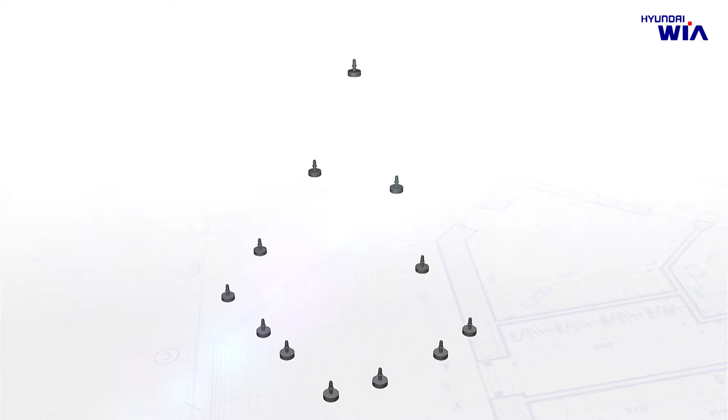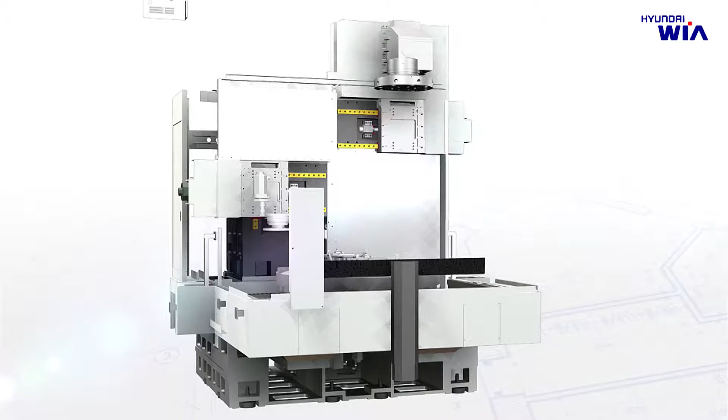Introducing Hyundai-Wia Machine Tools' newly developed alloy wheel lathe LV800 AWTT. Hyundai-Wia's next generation alloy wheel lathe LV800 AWTT, following the horizontal style L500, 600 AW, and vertical style LV800 RAW, uses two turrets and the automatic chuck changer to achieve maximum productivity.

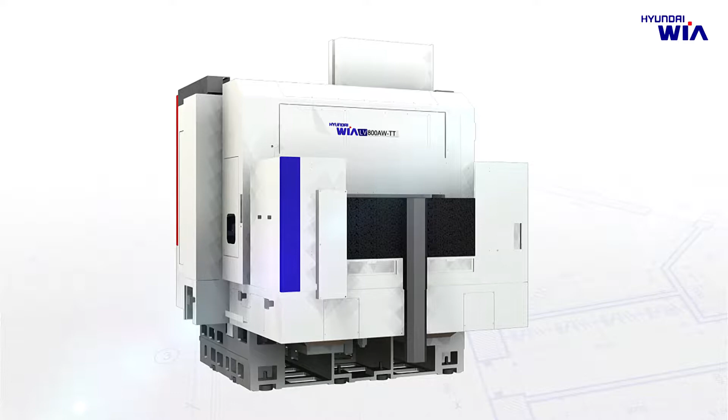Specially designed for 13-inch to 22.5-inch automobile wheels, LV800 AWTT is the vertical lathe designed with a highly rigid structure that can absorb vibration during heavy-duty cutting and wheel machining.

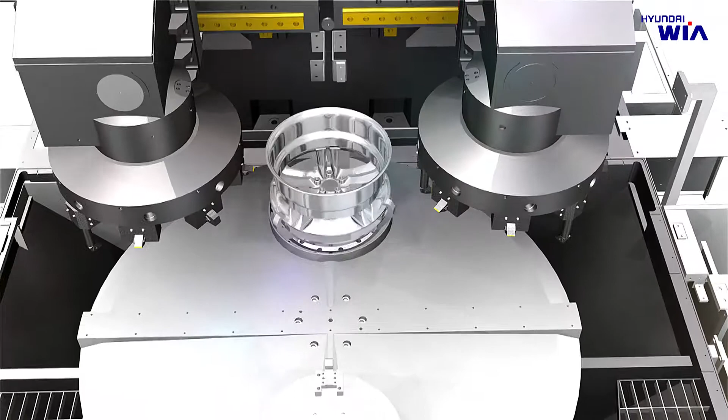For smooth chip disposal, the size of the chip outlet on the bed is enlarged to be 350 millimeters in length and 856 millimeters in width. It is installed with a steep angle of 45 degrees so that it can easily handle a large amount of chips.

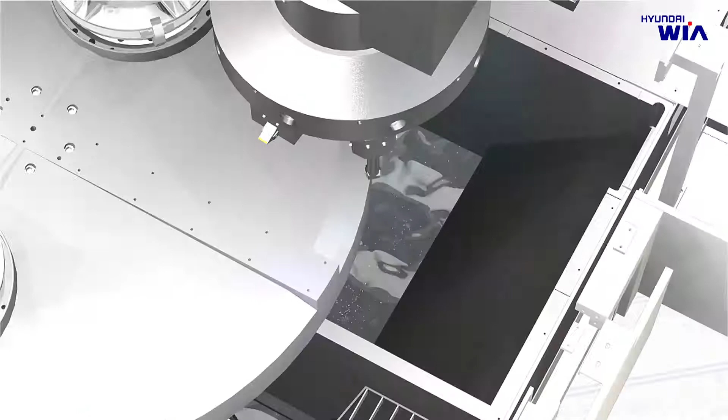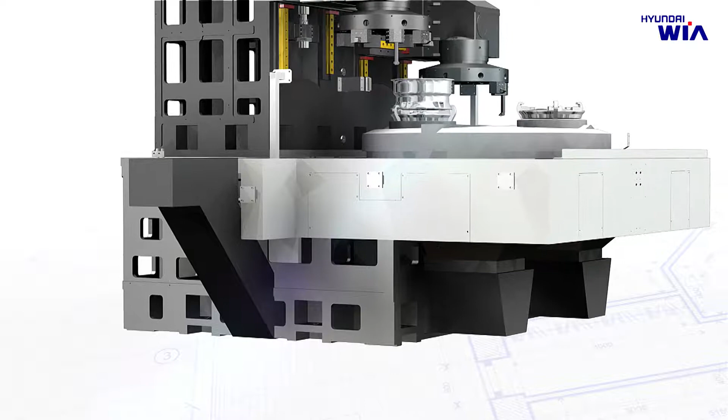Chips can be disposed of by the independent coolant method using the chip conveyor. A mesh drum chip conveyor is provided as an option, which prevents fine chips from falling into the coolant tank. This improves machining quality and durability of the machine.

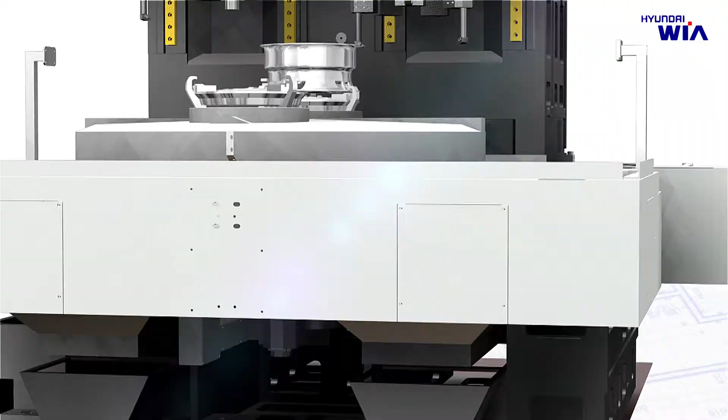When operating with multiple machine tools, the central coolant method can be applied, where chip outlets are made on the factory floor to handle a large amount of chips at once. Two high-pressure coolant devices on the machine can help chips to be smoothly discharged to chip outlets.

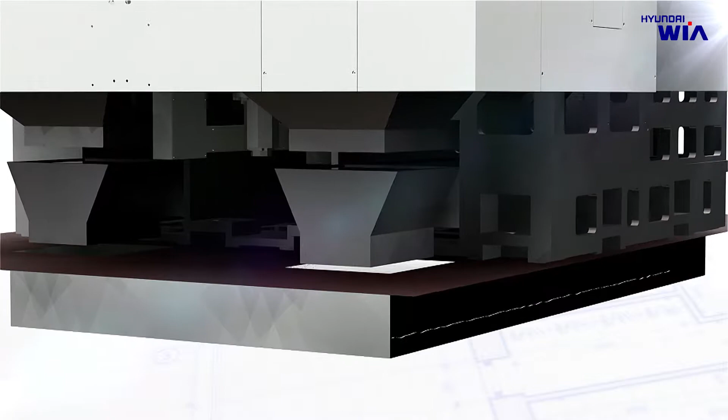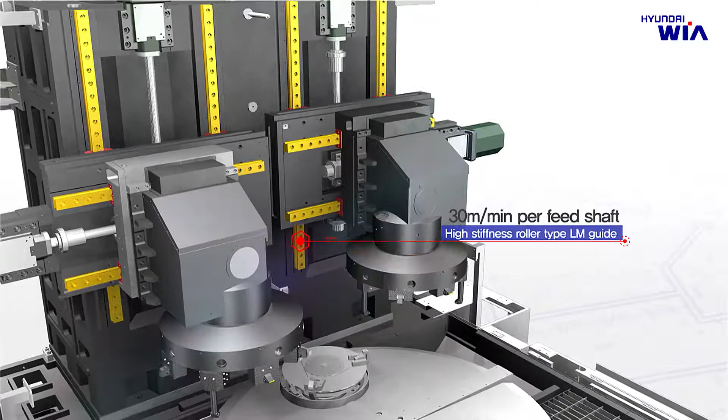Each travel axis is designed with a highly rigid roller-type LM guideway, which enables a rapid traverse rate of 30 meters per minute. The ball screw has a diameter of 40 millimeters and produces powerful thrust for heavy-duty cutting.

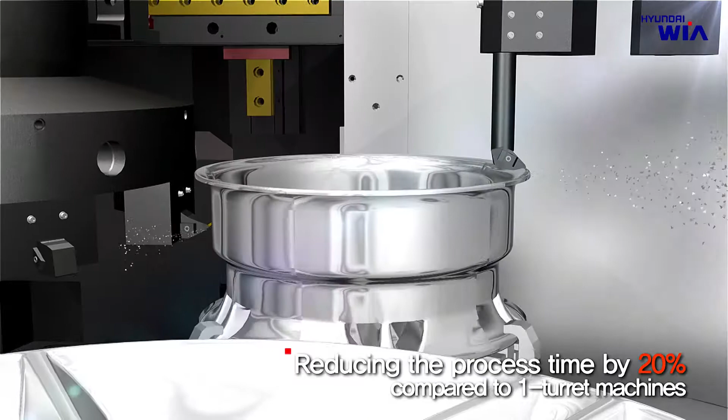LV800 AWTT is designed with two turrets. Machining inner and outer surfaces of the wheel can be done simultaneously, reducing the machining time by 20% compared to that of a one turret machine.

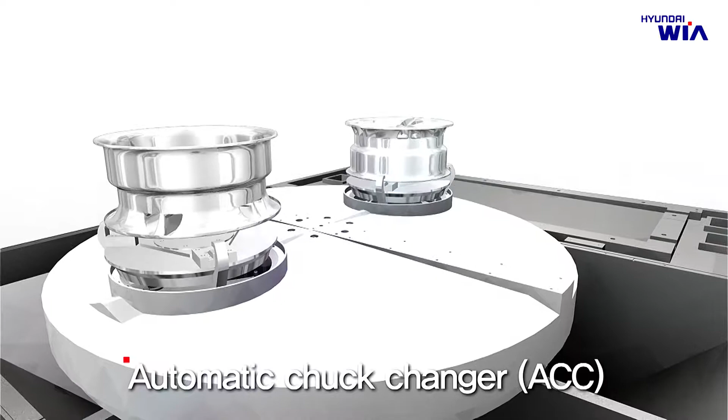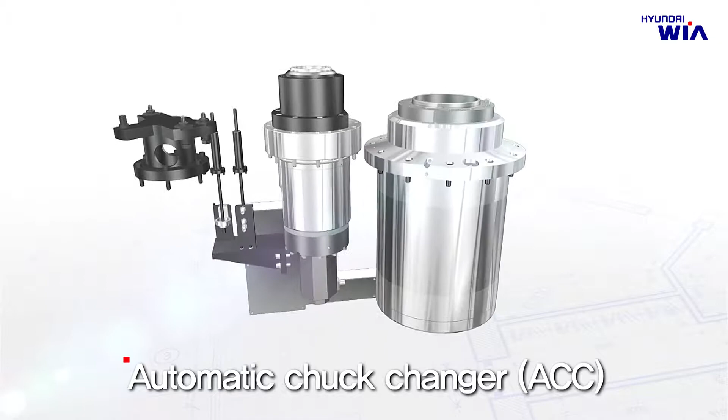LV800 AWTT has the automatic chuck changer, with high-speed 180-degree index rotation. This improves productivity, since the inner and outer side of the wheel can be processed at one machine. Smooth operation of the ACC is possible since it is driven by a servo motor, which allows for speed control that cannot be done with the hydraulic system. Also, the simple structure of the ACC minimizes potential fault causes of electrical devices.

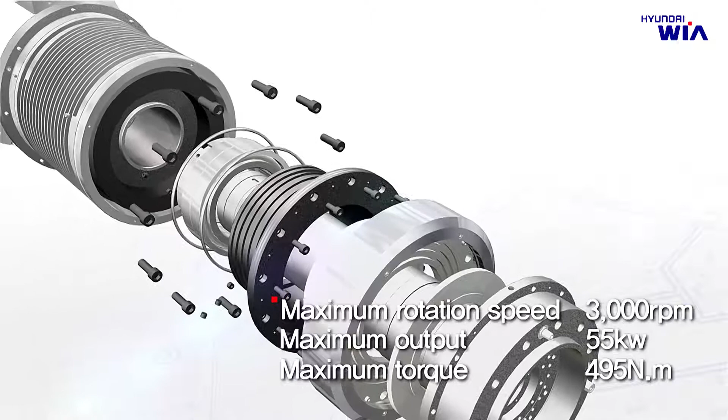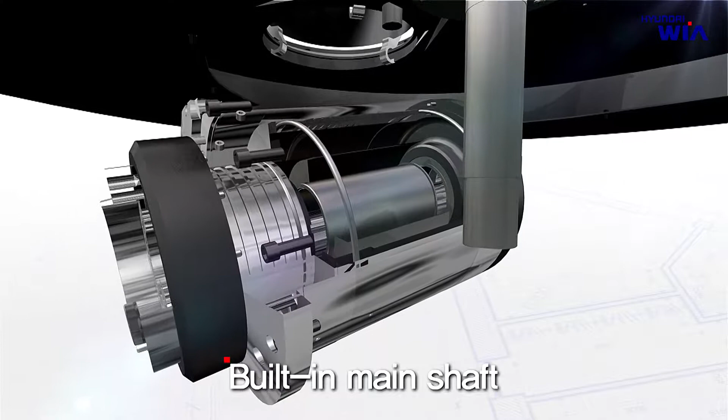The high-quality spindle design for wheel machining. The spindle of LV800 AWTT shows outstanding performance. It has a maximum rotation speed of 3,000 RPM, maximum output of 55 kilowatts, and maximum torque of 495 Newton meters. It is designed to perform high-quality wheel machining in all speed ranges, from heavy-duty cutting to highly accurate finish. Especially, the built-in spindle is equipped with a cooling system, which minimizes vibration to produce wheels with excellent surface finish.

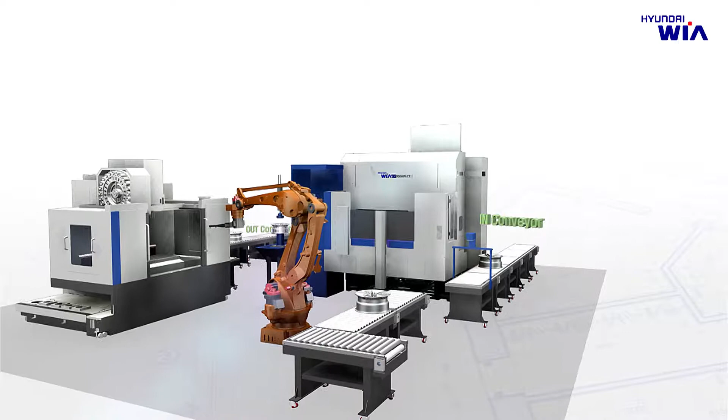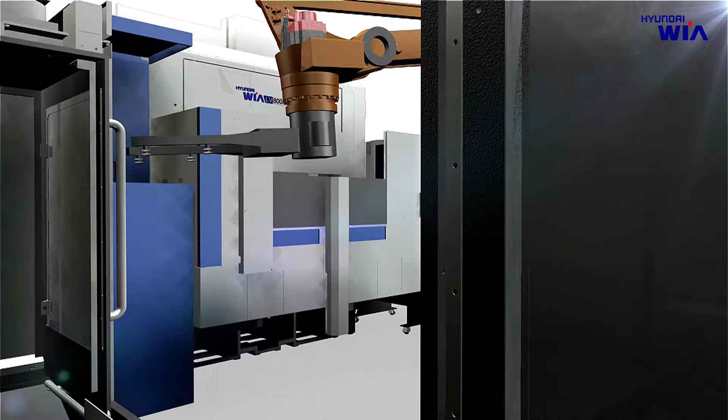Unmanned automated line boosts productivity. As the leader in the field of automation systems in Korea, Hyundai-Wia can maximize productivity of LV800 AWTT with the automated line consisting of the in-out conveyor, 4-axis robot, and the vertical machining center.

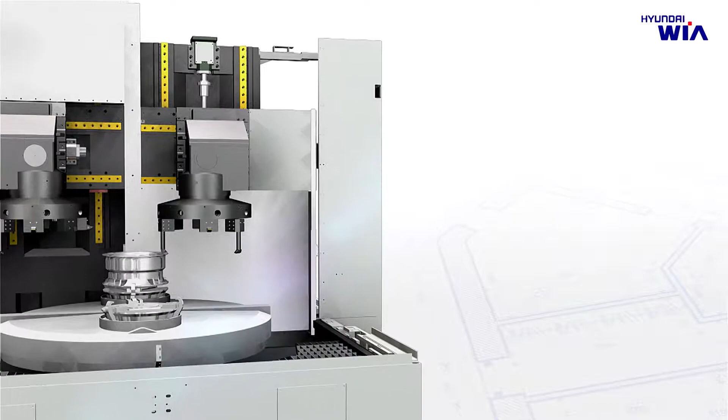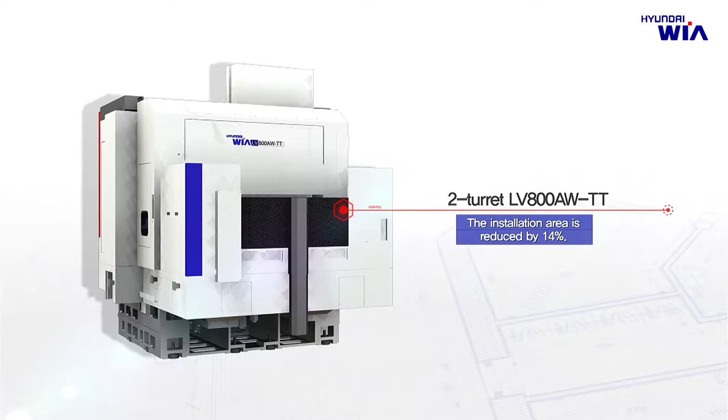The processing time for a 16-inch wheel is 115 seconds, which is 20% reduced compared to that of a one turret machine. A conventional automated line with a one turret machine required two vertical lathes for alloy wheel processing. However, with LV800 AWTT, only one machine is needed, so the installation area is reduced by 14%.

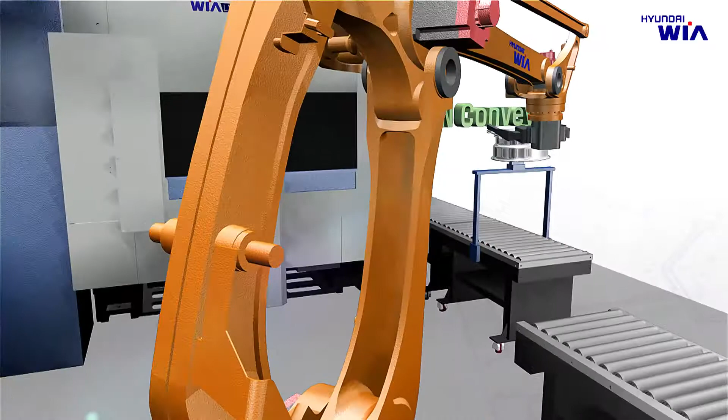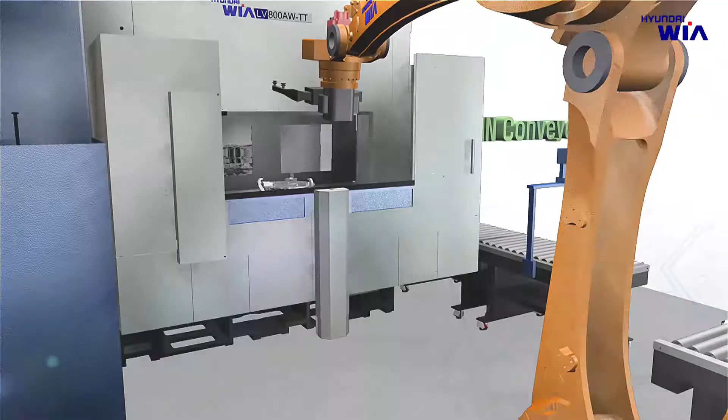In the automated line, when the alloy wheel is put on the conveyor, the robot clamps the wheel, checks the status on the vision system, and sends it to the ACC of the LV800 AWTT for the primary machining. After the primary machining, the robot moves the wheel to the air blow device next to the machine to remove chips on the wheel with high-pressure air.

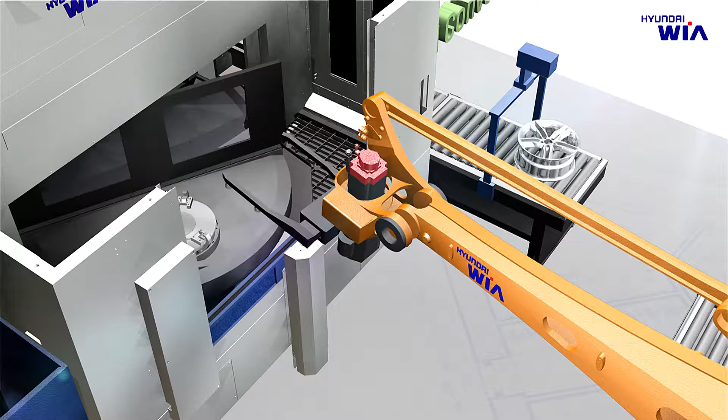It is then moved to the measuring equipment to confirm its condition. If a problem is found, the wheel is put to the NG station and discharged from the line. A wheel in good condition is sent back to LV800 AWTT to have its opposite side processed. After the secondary processing, it is sent again to the air blow device, which will remove the chips on the wheel. The wheel is then sent to the vision system of the in station.

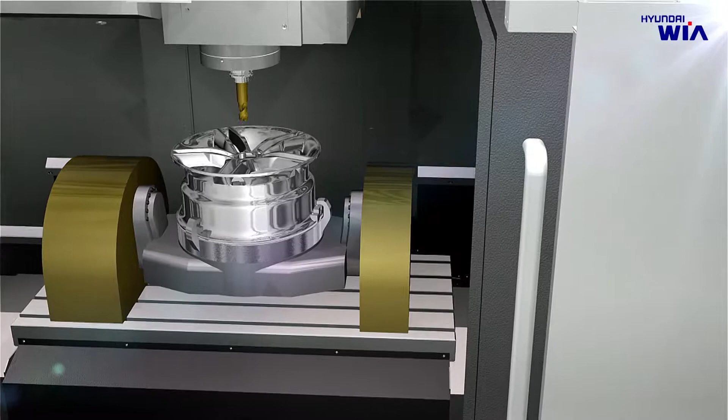Its status is measured again, and then it is sent to the vertical machining center for lug hole and air valve hole machining. Due to the wheel structure, a 4-axis NC rotary table must be applied for the air valve hole processing, which requires angle control. Therefore, the processing is done in the vertical machining center with a high column.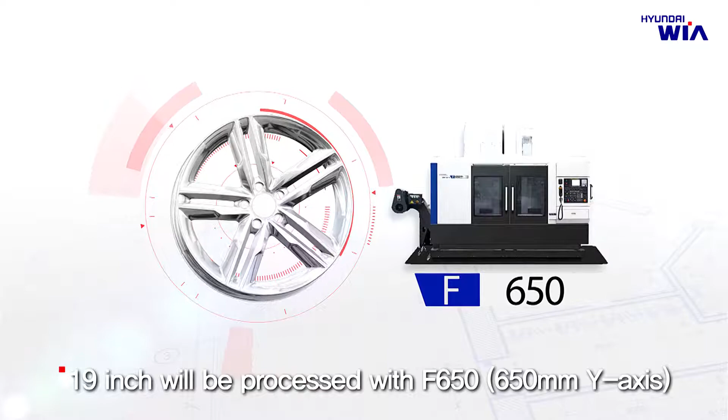For smooth wheel machining, it is recommended that a wheel smaller than 18 inches be processed with F500, with a y-axis of 500 millimeters, and a wheel larger than 19 inches be processed with F650, with a y-axis of 650 millimeters. Lastly, the alloy wheel that is processed in the vertical machining center is sent to the out conveyor.

New innovation in alloy wheel manufacturing. Maximization of productivity through automation. LV800 AWTT will make your dreams become a reality.